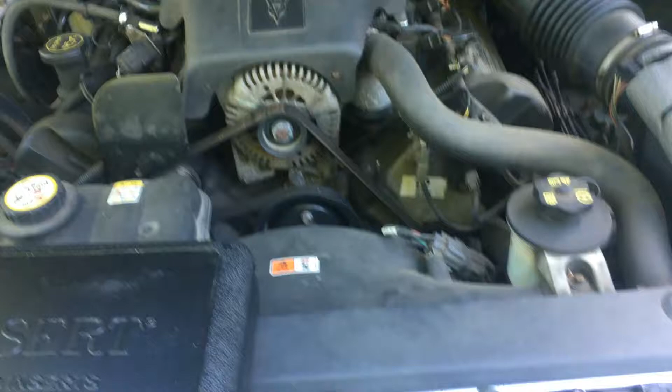Alright, so I have a blown plug previously paired with this piece of junk, a saver thread. Had it blow out. This is all mangled because I had to take it out, but here's the blowout. It took aluminum with it, so I'm not even going to try to screw that back in.

But this is the repair saver thread. This blew out. Apparently these are really garbage, so you want to bite the bullet and go with the Time-Sert.

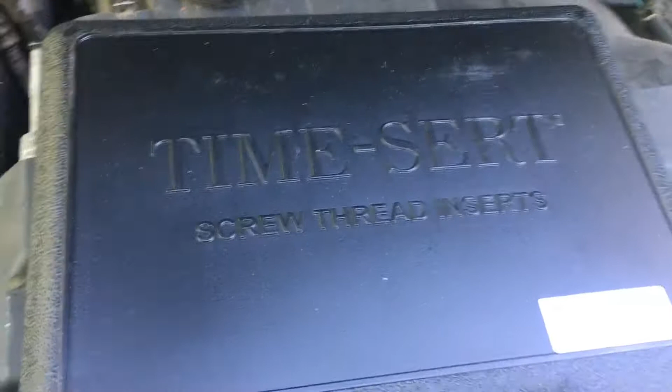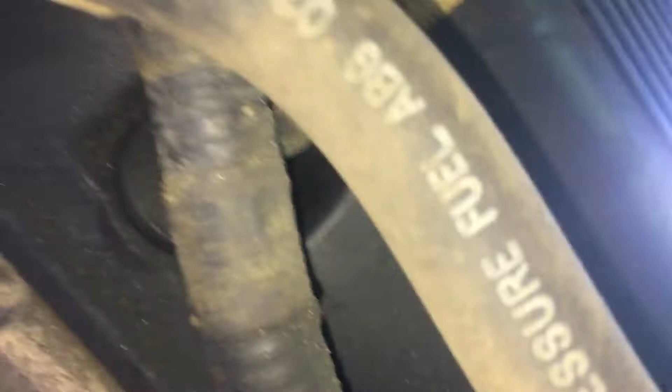Alright, so we're gonna come down here, the front facing. I got a light on, and where is it? Right there. This is probably recording inverted, but there it is, the 1J2E, or J2E.

And here's your header, the headers, and then it's above the header. And again, let's see, we're coming up. Here's the oil fill, there's the oil fill right here. So we're going oil fill down. You gotta have some light down there.

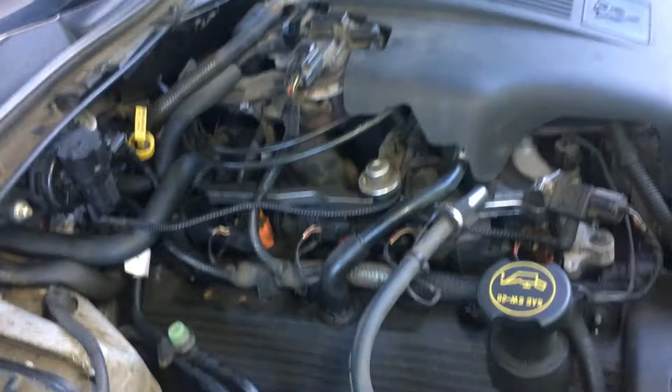So I got a blown plug right there. That's the hole. Down there. I don't know if I can get that to focus. Down there.

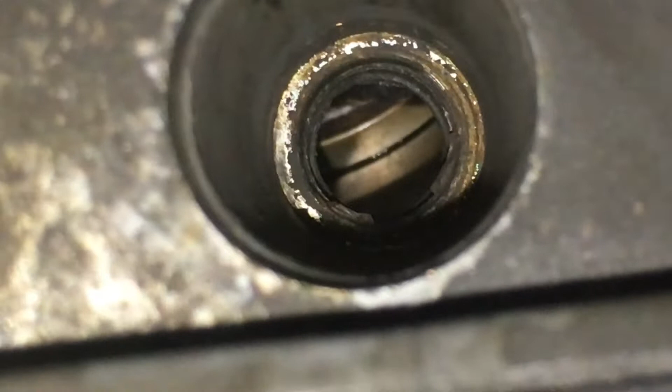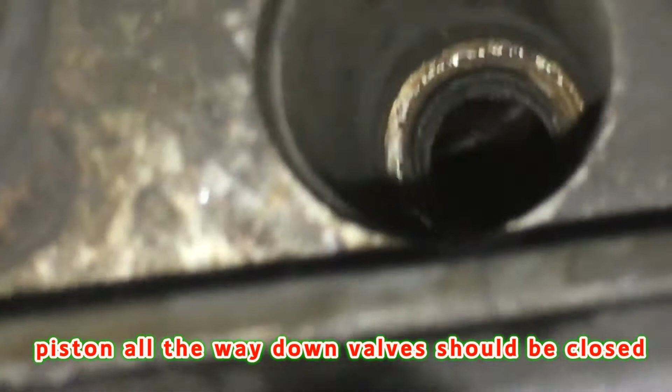Now the question is how deep is the spark plug? I mean the piston. I suppose you want to do this without having stuff go into the valves. You know, where's that thing? I'll try to stick this in here, see how far this goes down. I can't tell where the piston is.

Try blowing air in there and see if it blows back, resists, comes back. See how far did that go down?

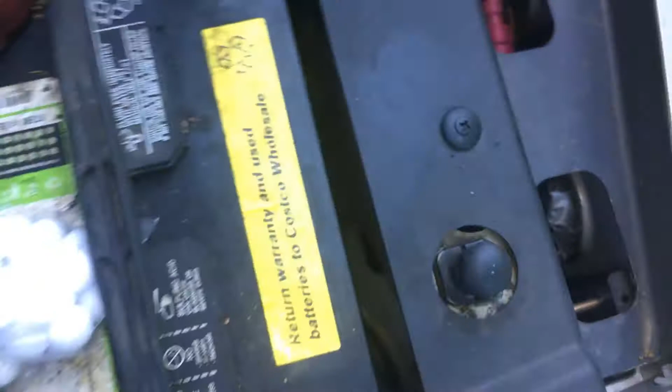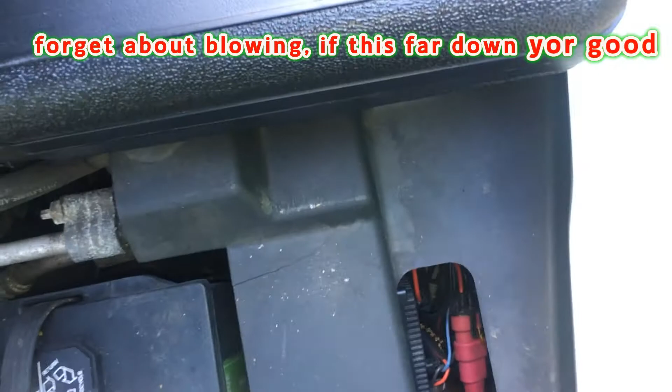Oh, I'm still zoomed in. That's on top of that. So that went to, I went to the top of the wiring of that injector. Let's see, from the front of the car, I went to my finger. It's about that far. I don't know if that's the piston down or not. I'm gonna try blowing air in with a seal and see if it pushes back on me.

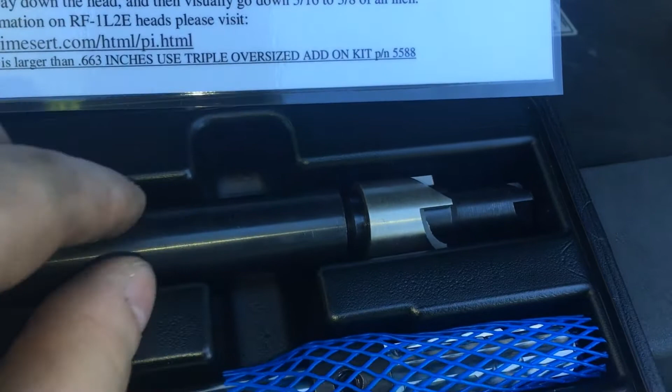Okay, so with that head, the RF1L2E, you need to do the counter bore to chip off the top as this, and then you need to tighten it in there with this Allen. Tighten that in there, and then that needs to go down in there. And they're saying to only cut—

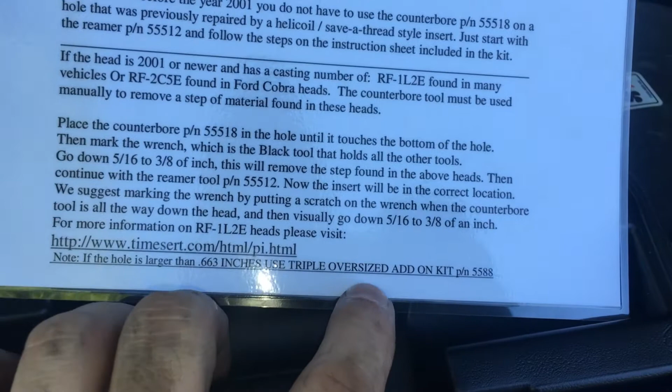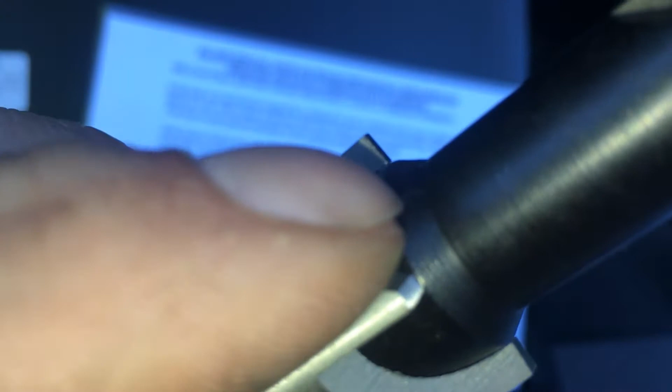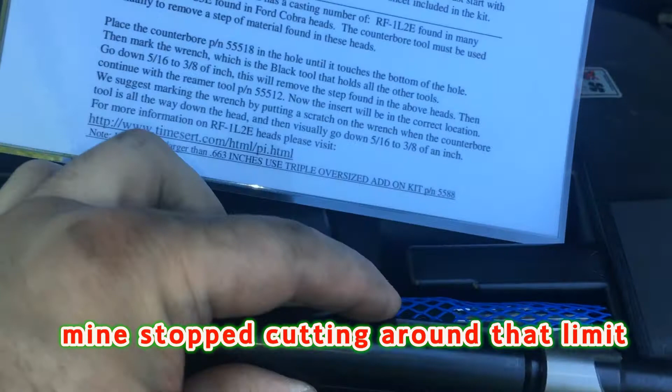5/16 to 3/8. But they also said once it hits the taper, it'll just spin. Once it hits the taper that's in there, it'll just spin. But maybe there is no taper in there, that's the problem. And you have to go down 5/16 to 3/8. So you got to stick it down the hole and then mark off how deep you need to go.

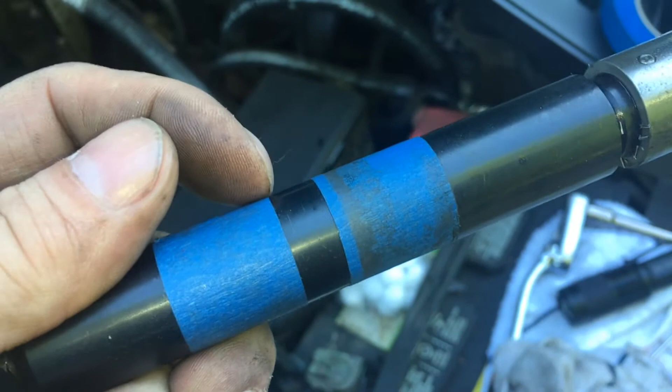Alright, so it was this deep and I got to cut all the way down that far. It seems far. I'll probably WD-40 it, ream it for a little bit, and then pull up and get the filings out. Doing this manually looks like it's going to take forever. It almost seems like this is way too much to cut off. Well, we'll see.

Also, the reaming tool's diameter just barely fits down the hole. Make sure you make that Allen wrench real tight, or you're gonna have to reach down there and pull it up out of there. See, it just barely fits in the hole, and there's a bunch of filings coming off. How much more do I got to go?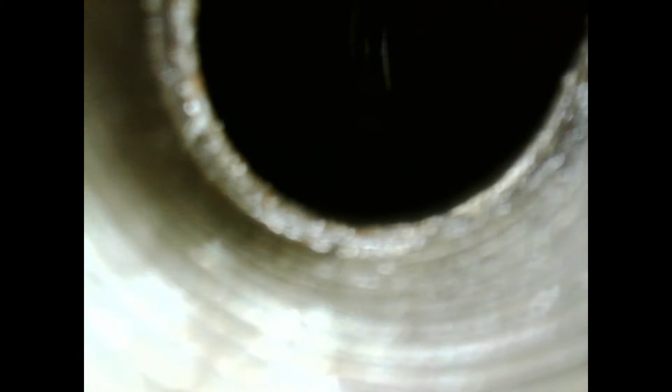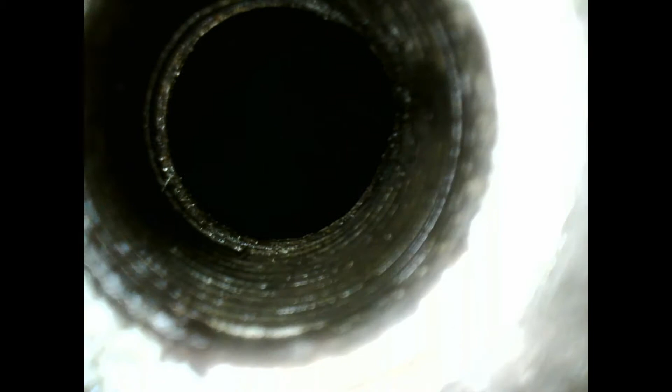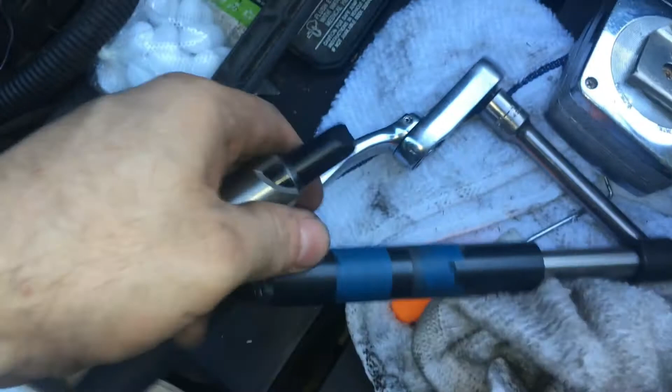Okay. So I had marked it there, and it seemed like I was way down and I wanted to stop doing it, but I kept going, and it got close to this line, and then it just seemed to stop cutting, which supposedly is when you hit the taper. No matter how hard I pushed down, it wasn't cutting anymore, and the hole obviously isn't reamed out.

So I guess then when they say to measure it, it's just so you know around when it's going to stop cutting, because otherwise you do it until it stops cutting.

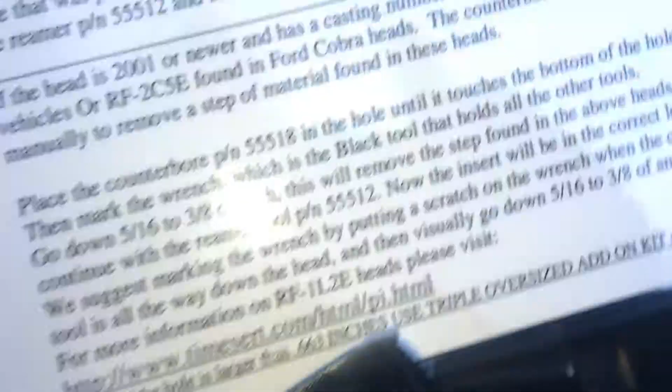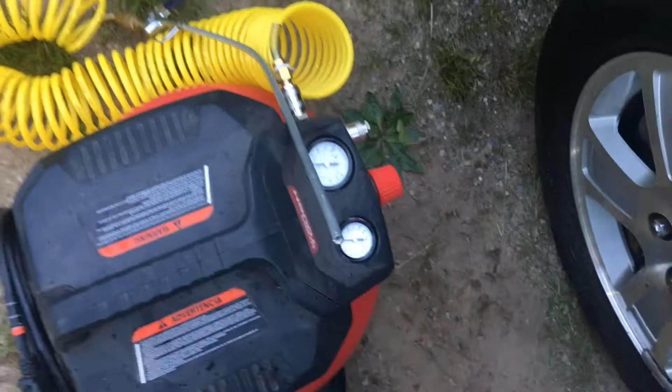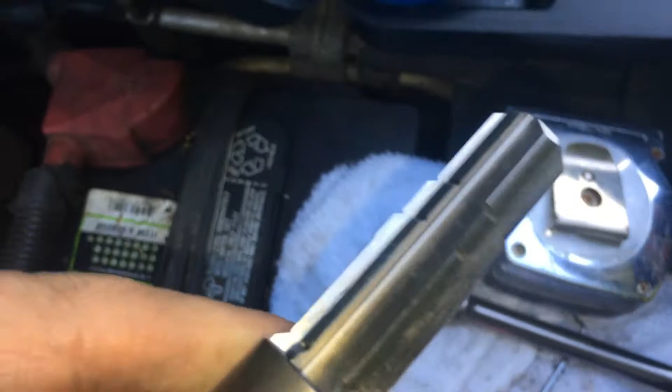Also, about every 20 turns I went in and blew out the filings. And you saw I went down in there with the camera, and you only saw one tiny piece in there. But now the big reamer, the big boy's gonna go in there and start ripping it up. This is nerve-wracking, to tell the truth.

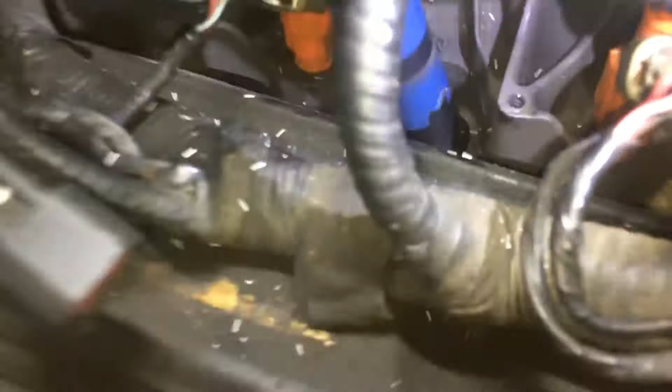Alright, so on my lines, when I insert the reamer, it goes down to about there. Now let's see how far down it reams. Well, it's going to ream the whole thing out, but let's see how far. It's going to ream out until it hits the sitting cap. Let's see where it is, level right there. I wish I had taken a picture when I started with the other one.

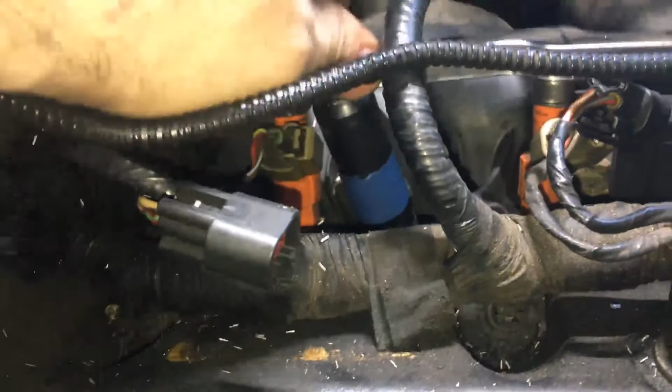Alright, so it didn't really ream that much, maybe because I had a bigsert and it's just spinning and not doing anything, and now I'm sitting on top of this again, taking a picture, and now it's just spinning. I think it's actually hitting the seat thing, and it's not cutting anything anymore.

So now, I guess it's thread time, which would be that one. Thread, and then that's the expansion.

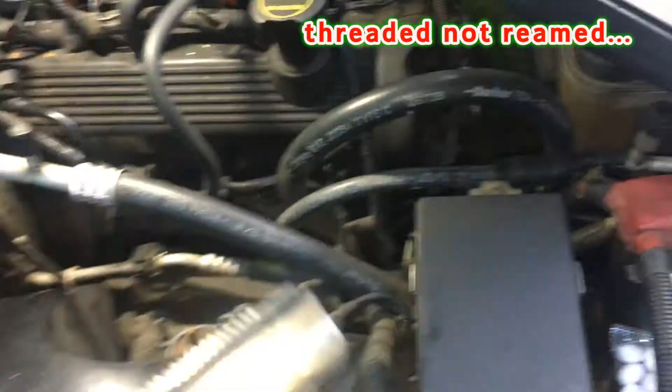Alright, so I threaded it out. It only got stuff up to about here when it came out. I just blew it out. I can't tell, is it threaded? It certainly seemed like it was threaded.

That worries me. I can't see threads there. Can you see threads? I can't see anything. But it's threaded in.

I'll try spinning it in again and see what happens. Next is to get this tool attached to this.

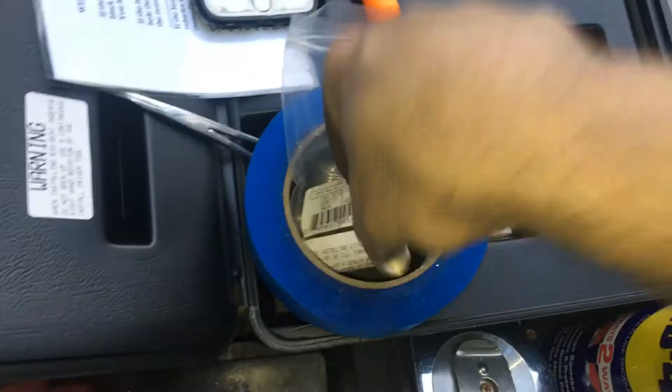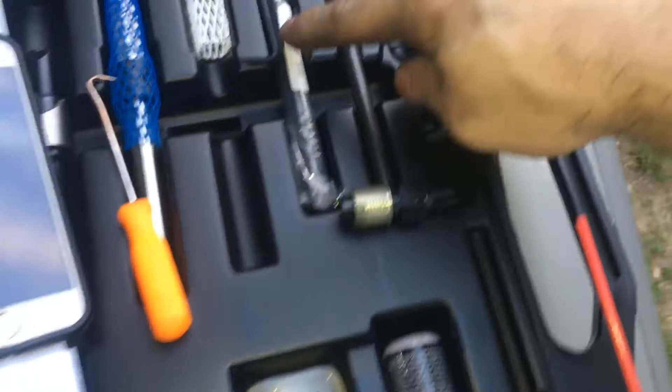Jam it in there, put Loctite here, and then go in with this so it spreads the threads out, supposedly. I hope this works.

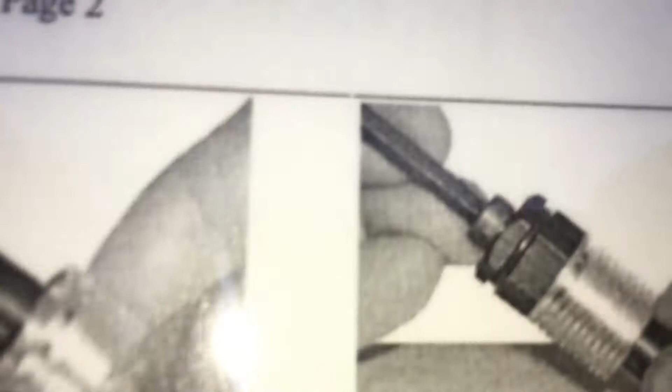Now, lock that into there, press it in. Now doing Loctite, and that's the hole. There's a little dimple right there on the end, and then Loctite around the middle. It says around the middle. The wrench.

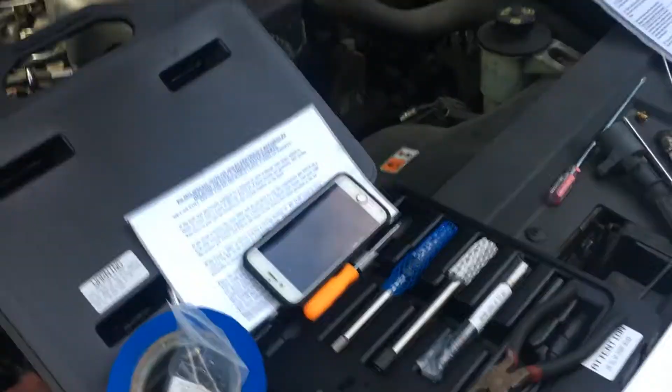You gotta screw it in, screw the insert and hold it, approximately 20 foot-pounds. You gotta stick this Allen wrench all the way down the center, and it unlocks this from it. You gotta use pliers to get this to release.

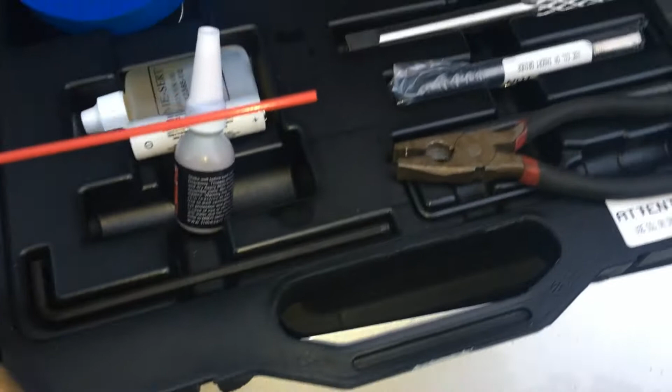Then it should come up without your insert on it anymore. We'll see what we got down there. I can't even see the insert. I guess it's seated into it. I can't even see the damn insert.

Now we have to use the spreader tool, and you have to apply some cutting lube to it. This is going to go down and make the bottom of the thread spread out so it's too big for it to come back out.

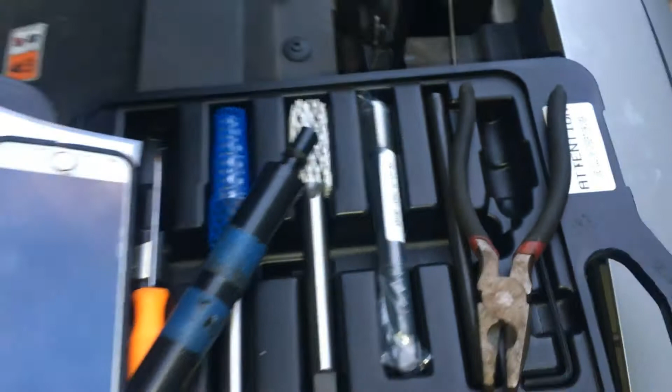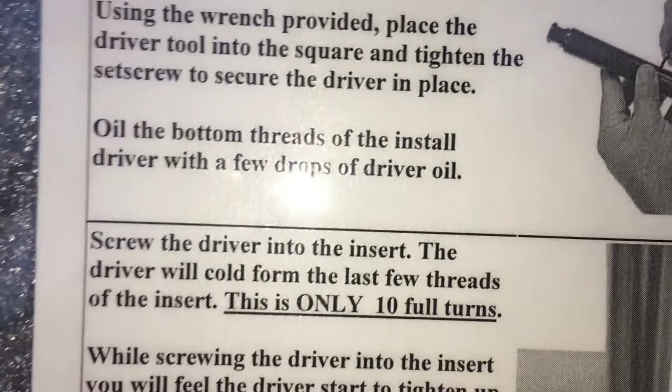Well, I reamed in, and I didn't count to 10 because I didn't understand what was going on. It says insert it, screw the driver into the insert. The driver will cold form the last few threads of the insert. This is only 10 full turns.

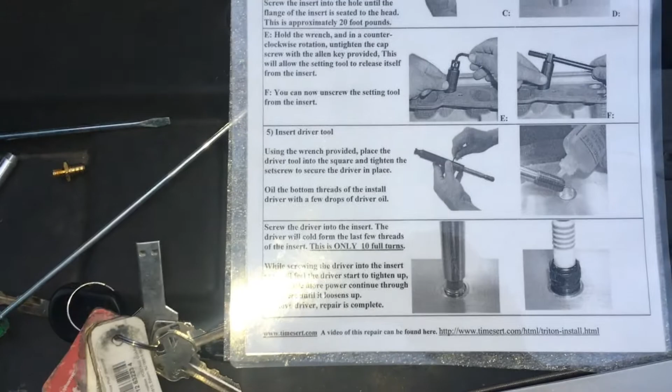So I don't really understand that, because you start screwing it in and it's not hard yet. I didn't count. It started getting hard, because that's what you're really feeling for. It got hard, hard for several turns, I don't know how many exactly. Then it started getting a little easier.

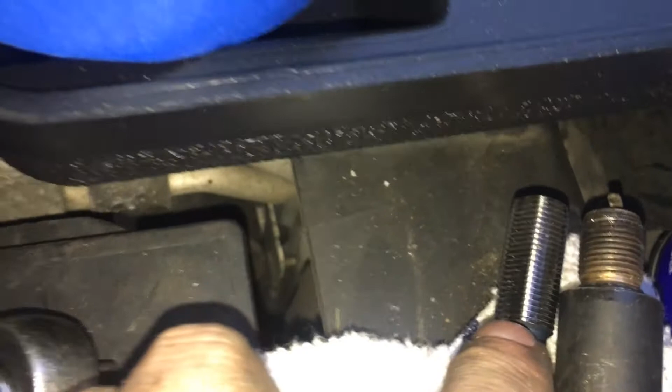I didn't want the insert to go all the way past that lip, because then you'd have a problem getting it out. So it got harder, then easy for a couple turns, and I was like, screw it, and I took it out. Then I stuck the spark plug in there, and I was able to get it in tight, but I'm not sure if it's all the way in.

But that's what it looks like now. I'll try to go in there with the camera. Is that the insert into the lip there? It's hard to tell, but there's an insert in there.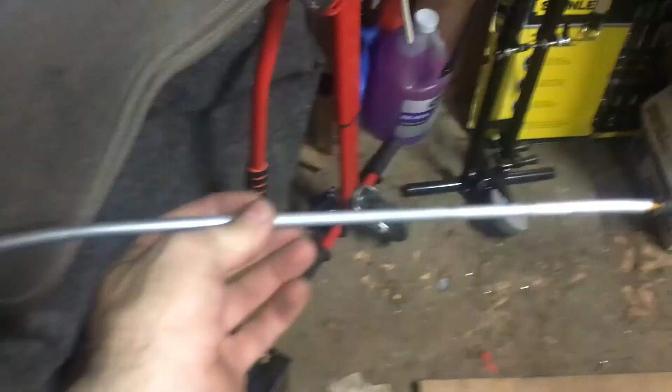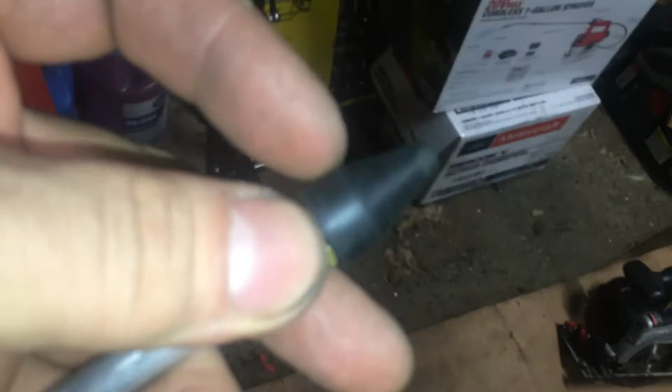Okay, so stupid thing of the day. I went and pushed this down the spark plug hole, but I couldn't see what I was doing because I didn't have this bend in yet. I didn't realize this was smaller than the spark plug hole, or just the right size. So I was pushing and pushing, couldn't see what I was doing.

Then I felt it poke in, and then I felt that it was all loose. I was like, oh shit, and I looked in, and this was down into the cylinder. So I started pulling it out, and it caught on the edge and did this, got caught in the spark plug hole like that.

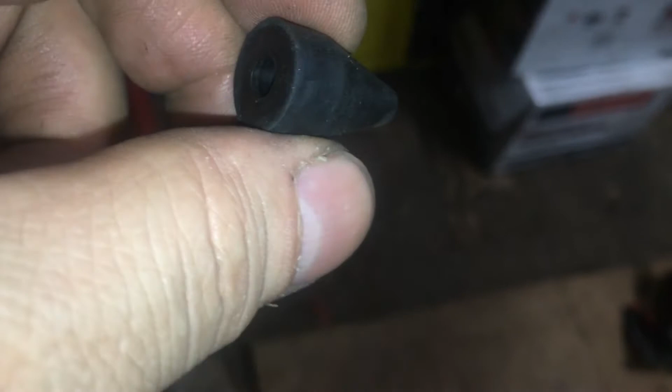I think I took a picture. I tried to get it out, and I couldn't get it out. So I said screw it, and just started the car up. And I heard dunk-a-dunk-dunk-dunk, which I guess was this bouncing around in the piston hole. Then the noise stopped.

That's when I looked down into the cylinder with the camera, and I didn't see this down there anymore. I looked around the top of the engine, couldn't find it. I looked under the car, couldn't find it. But I'm parked on the grass, and thank God it was under the car.

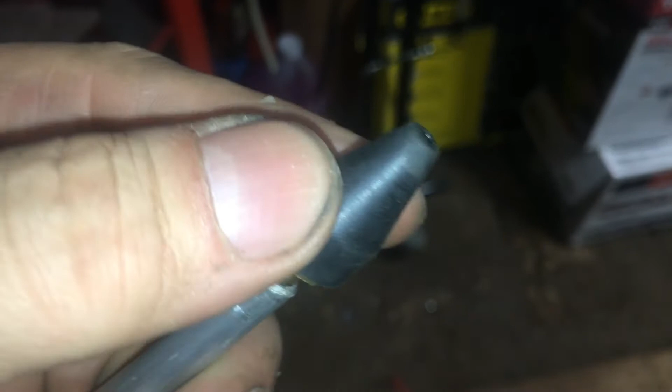I was all worried that this was going to get stuck in the valves or something, although I don't think they open big enough for this. I was also afraid it was going to melt on top of the piston. I thought that black I saw on top of the piston was this all melted up.